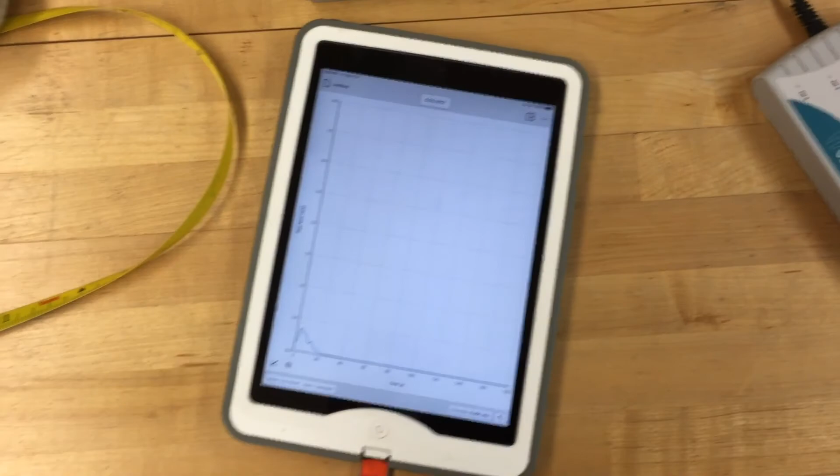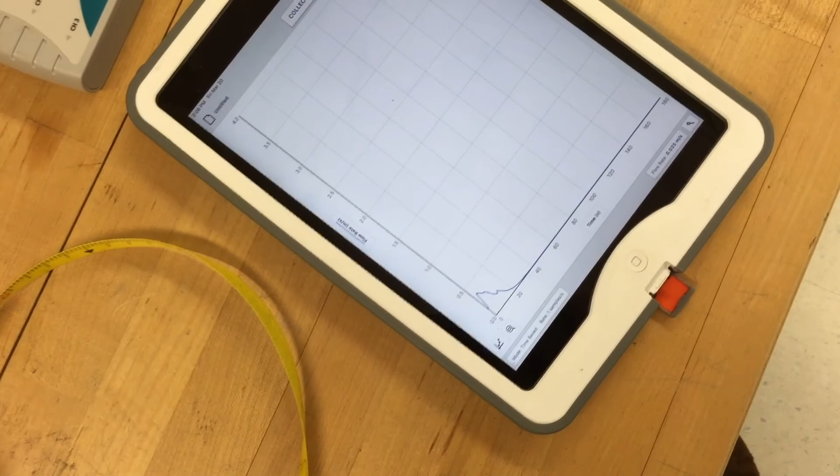Okay, we're back. So it's hooked up and ready to go, and you can see that it's had some time running along here. Ultimately, this is the time when I need 3 hands. But if you look at the graph here, and I spin the propeller, we have to push collect. And now if you look, when I spin the propeller, you can actually see that a line is being generated, and then we can save that, and it'll give us the velocity of the stream at whatever depth that we put it in.

So that's a little bit prep on the equipment. Now I'm going to go out and get in the car, and we're going to drive out and do the field trip. So I'll see you in a few minutes.

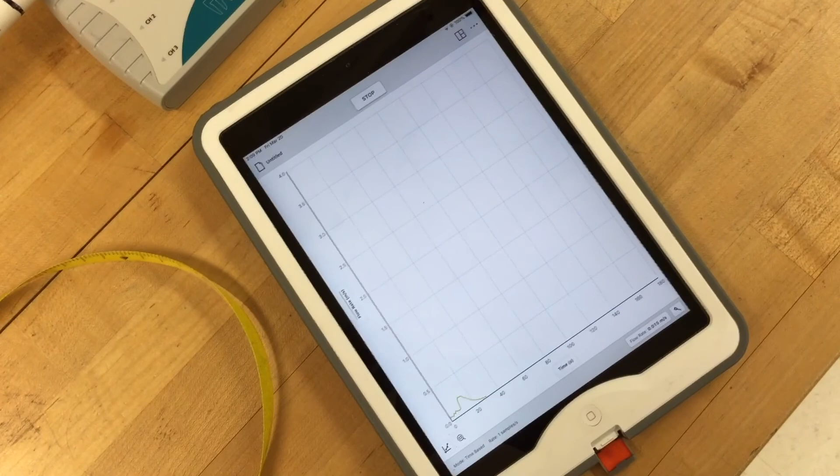Good afternoon, and welcome to the Carrabassett stream. We're located about 15 miles from the Colby campus, and we usually come here on a bus, but you can watch this field trip and complete the exercise in the comfort of your living room, your study, your bedroom, wherever you happen to be doing this.

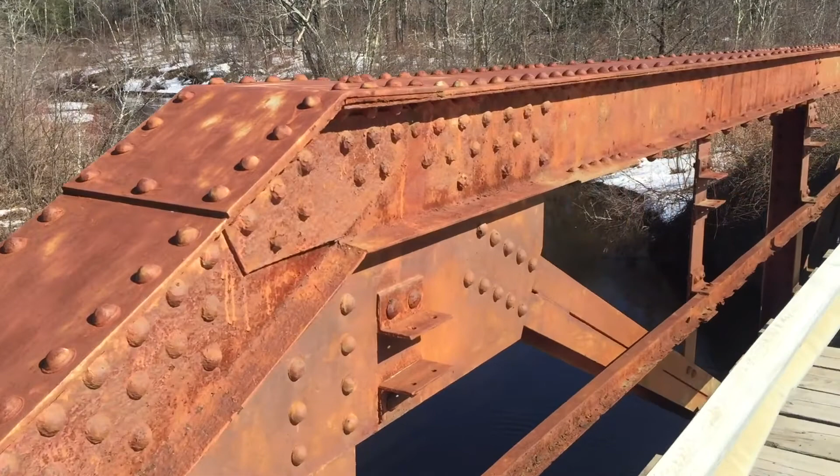Geologists have always looked at streams because streams have a variety of different capacities that they perform geologic work. Probably the one that's most easy to recognize is the fact that streams move sediment. But that's not the only reason that geologists are concerned and interested in looking at streams. One of the other things that we're concerned about is the fact that it produces energy. Water going over a falls makes energy. That produces power. We can use that to run a mill. We can use it to generate electricity. We can use it for a variety of different things.

What we're going to do today is we're going to actually calculate and measure the amount of water that flows underneath this bridge in a given amount of time. And what that measurement is called is discharge, and we use the letter Q to calculate discharge. Now, you should be a little bit familiar with discharge because it's just the volume of water that goes by a given point in a given amount of time.

You did that when you calculated permeability. Permeability is just the amount of water that flows through a sediment in a given amount of time. So you did that when we did that laboratory that looked at porosity, permeability, and grain size. So we're going to look at a little bit bigger body today. We're going to look at the Carrabassett stream. And the Carrabassett stream is a small tributary. It flows from Oak Pond up in Skowhegan, and it flows through Canaan and Clinton and ends up in the Kennebec River, just about where the big bridge goes over in Fairfield.

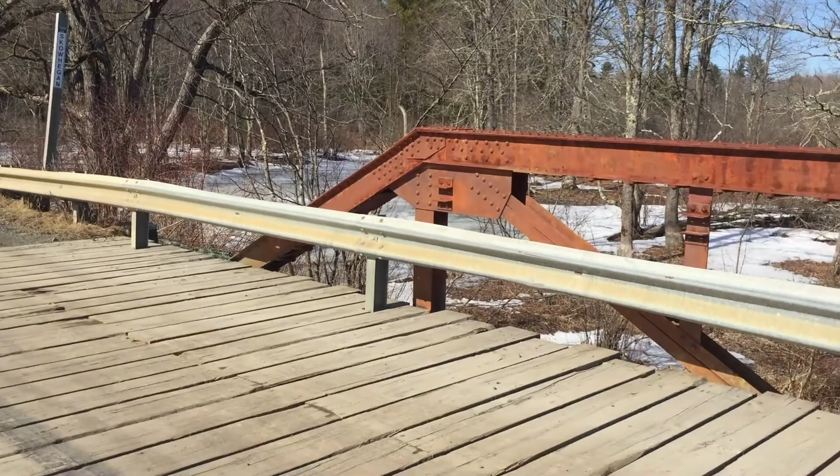So we have to take 3 measurements today during the course of our exercise. We've got to measure the width of the stream, and basically we'll just put a tape measure over to that side of the stream. Our measurements will be in meters. So we'll figure out maybe it's 15 meters, maybe it's 16 meters across, and we'll leave the tape measure there between the guardrail and the bridge abutment.

And every meter, like 1 meter, 2 meters, 3 meters, we'll go across and we'll actually take a big rock attached to a rope and we'll measure the depth. Then we'll take all those depth measurements, be it 15, 16, 20, add them all up and divide by the total number of measurements that we took, and we'll use that as our average depth. So we have two measurements, the width and the depth, and now we need to calculate the velocity.

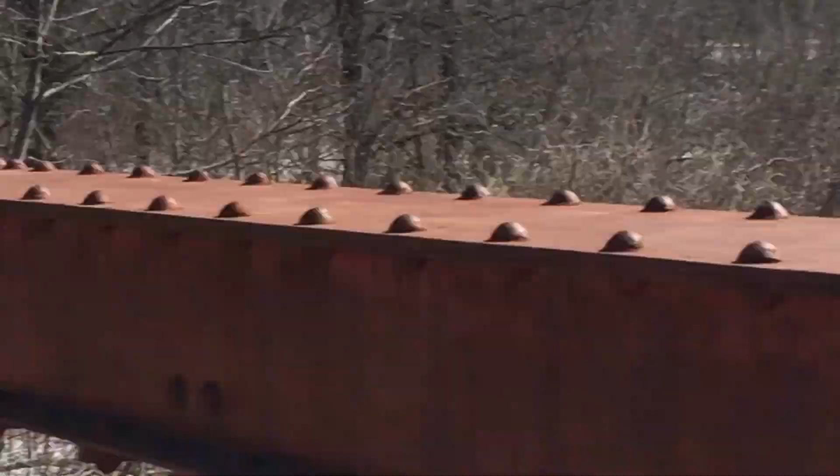If you look at the stream today, we can zoom in a little bit at the water, you'll see that the water is actually moving at a pretty good clip. You can see the current, and it looks like the water is coming at me. And if we go across, we can see the water's actually coming out underneath the bridge and flowing away from me on this side. So if we look at the geography, north is that way, and south is this way. So the stream flows pretty much from north to south.

There's a real simple way we could do this. We could take a stick, throw it in the water and time how long it takes to go from underneath the bridge to the other side. Then we could measure it, and we'd have distance over time, and we could calculate the rate. But what we found out is that the average velocity of the stream, which is what we actually need, is not on the surface.

Usually when I come out here and I ask students where they think the stream is the fastest, most everyone says at the surface. And there's a little problem in there. It's not exactly at the surface. There's friction between the water and the atmosphere, and maybe even the wind. You might be able to hear it today, though it's not too bad. The wind and the water actually cause the surface velocity to slow down.

So then people immediately will say, oh, then it's at the bottom. And it's not really at the bottom either, because there's even more friction at the bottom, friction between the water and the bed of the stream. So what we have to do is figure out where we would measure to get the average velocity.

What geologists have found over time is that if we take a depth measurement and we go down 6/10 the distance from the surface, it's a very easy calculation. Say right here at this point, we measured 2 meters. We'd multiply 2 meters by 0.6, and we would get 1.2. So we would take our velocity gauge and go down into the water.

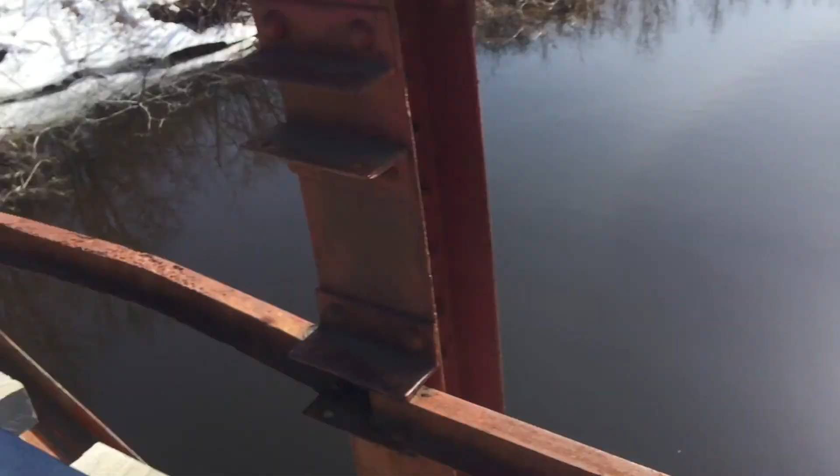We measure in meters of width, meters of depth, and meters per second of velocity. So if we multiply those three units together, we would get cubic meters per second. Now, in the United States, we're one of the only countries that doesn't use the metric system, so we typically measure discharge in cubic feet per second. And there's 35 cubic feet in a cubic meter.

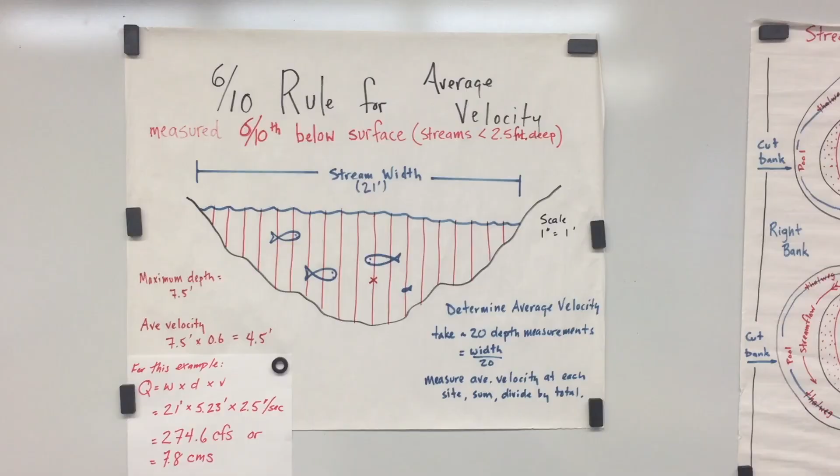So if we had cubic meters per second as our discharge, we could multiply that value by 35, and we would get cubic feet per second. And I think that pretty much takes us to the point where we actually would measure the stream and do the calculations. All right, some information that we brought back from the field. When we measure the average velocity, what we're going to do here is use the 6/10 rule.

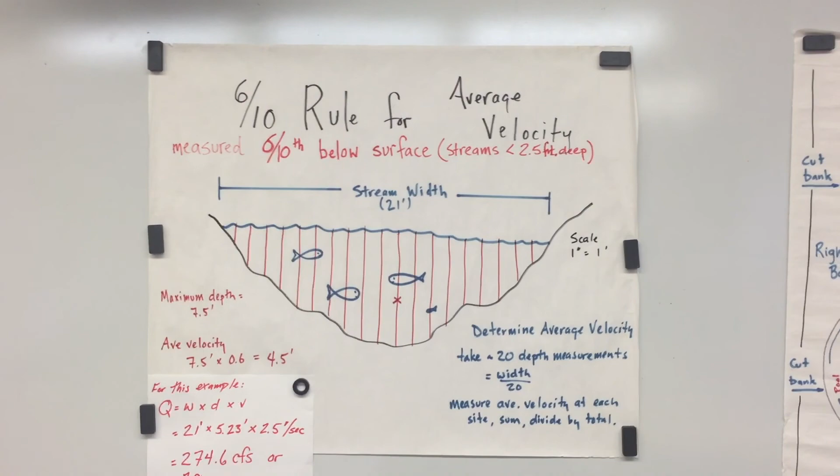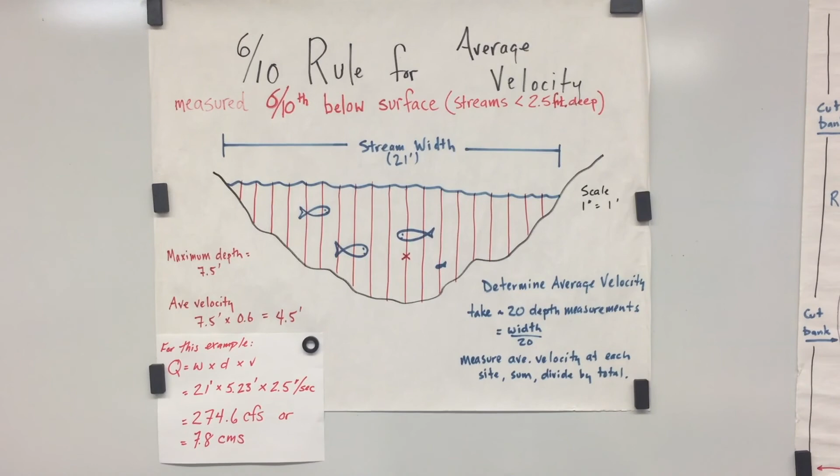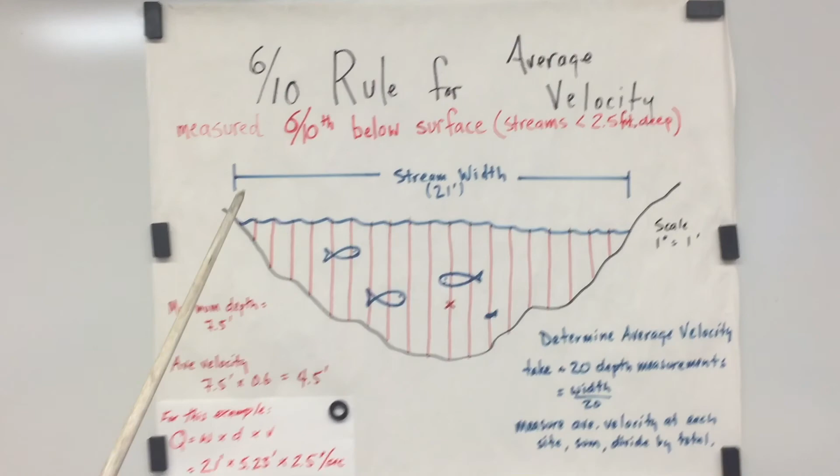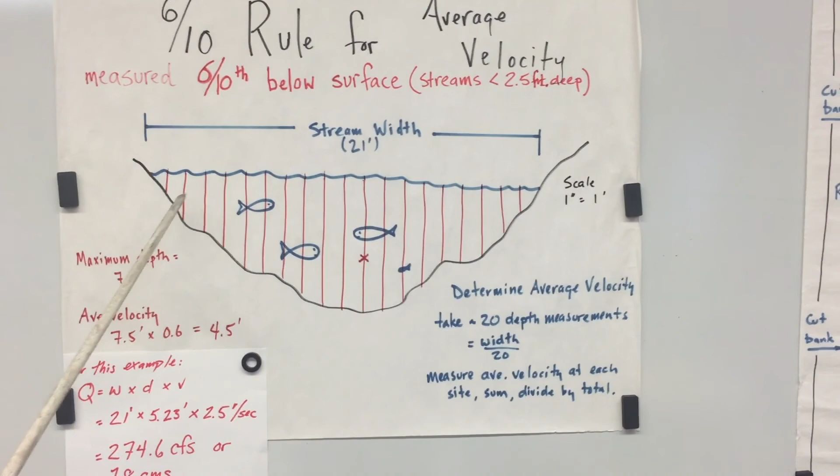And I think when I was measuring in the field, I used the wrong measurement. What I said was 6/10 of the distance from the bottom, but what we should measure is 6/10 the distance from the surface of the stream. So in this particular example, we're looking at a stream that has a width of 21 feet. We measured it every foot going across, so we have 21 measurements. We have a maximum depth of 7.5, and we added all those up, divided by 20, and came up with a depth of 5.23 feet.

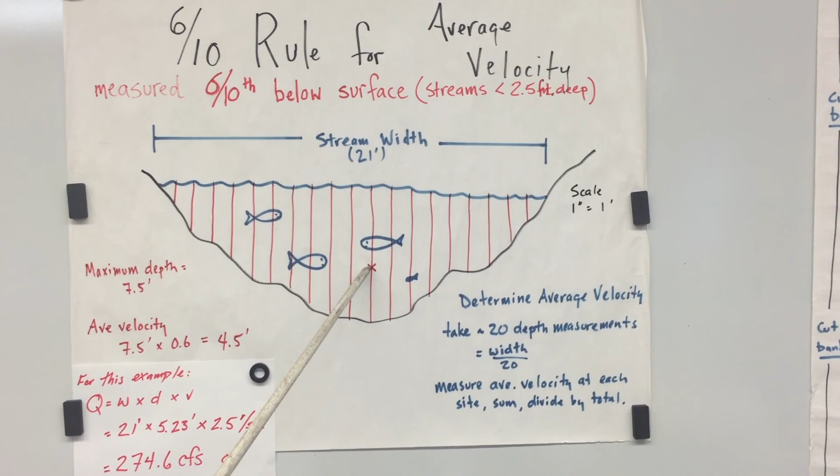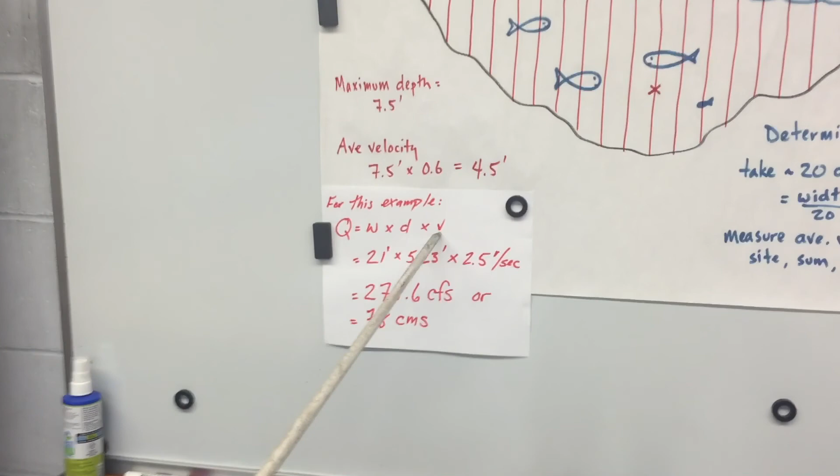Our average width is 21 feet, and to figure out where we're going to measure the velocity, we take our maximum depth, which is 7.5 feet, multiply it by 0.6, so we would come down at 4.5 feet, and that's where we measure the velocity. And arbitrarily we're going to say that the velocity in this particular stream came out to be 2.5. So we plug those into the formula where Q, which is the discharge, equals the width times the depth times the velocity.

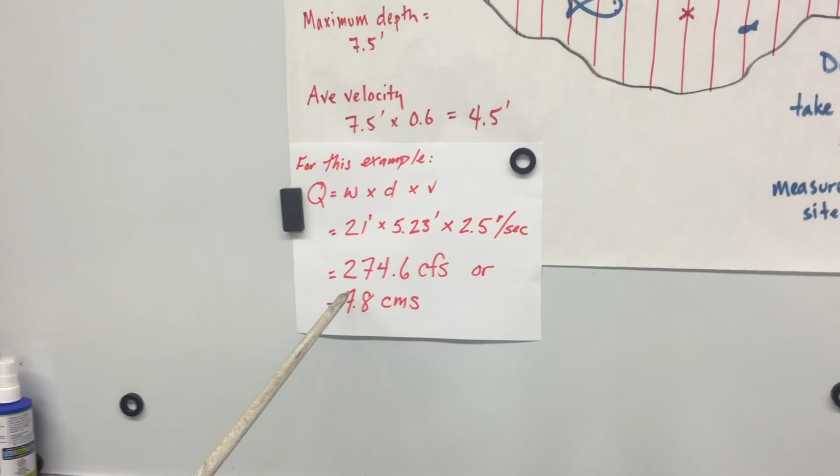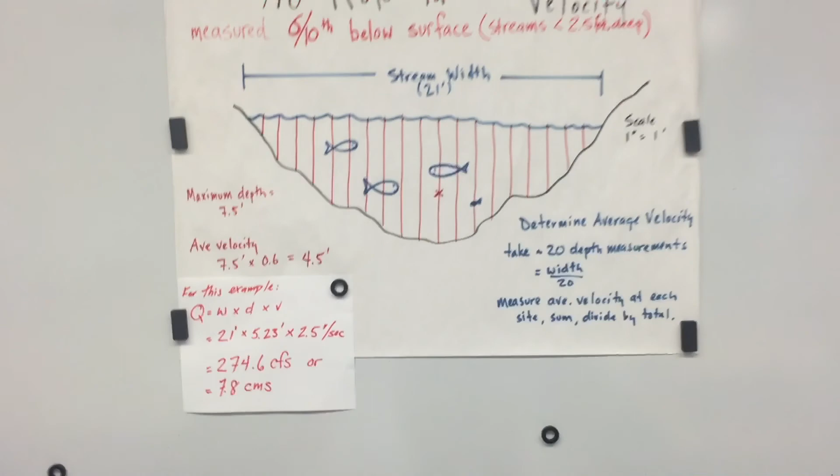The width is 21 feet, the depth is 5.23 feet, and the velocity is 2.5 feet per second, and we come up with 274.6 cubic feet per second, or if we convert it to cubic meters per second by dividing by 35, we get 7.8 cubic meters per second. So there you have a better explanation than I did out in the field, and that should work for what we need to do.

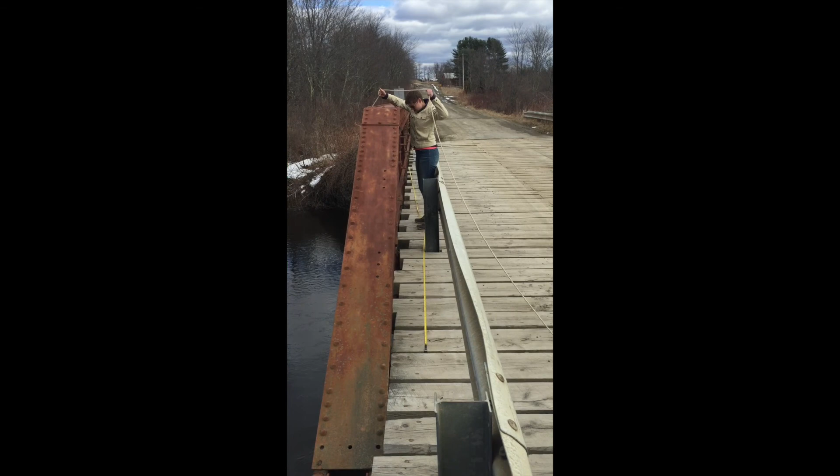Okay, so we got some live science going on here at the Carrabassett stream. My two colleagues, Laura and Manny, are dropping the weight down in and measuring the depths. We're going to add these cumulatively and come up with an average depth for the stream. You can see we have the tape measure set up between the bridge structure and the guardrail, and we're going to lower the weighted measure into the water at every meter going across. And we found the width of the stream is 14.9 meters.

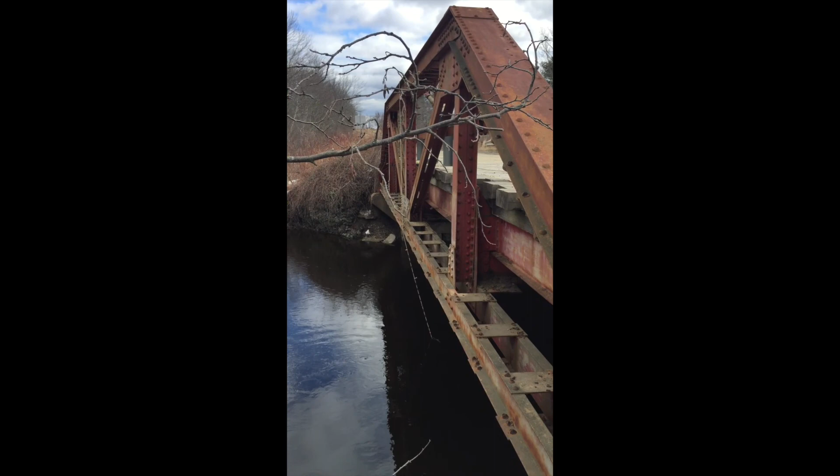Right now we're about halfway across the stream. We're saving you an awful lot of time of watching the excitement of science.

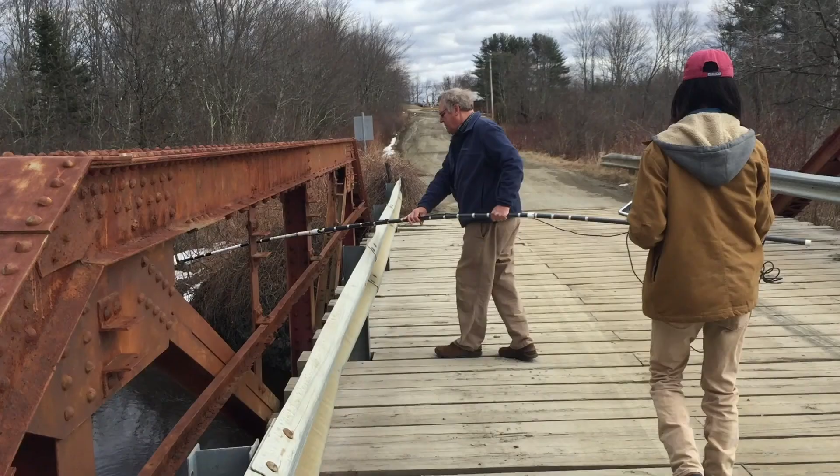What would you say this is? Oh, it's kind of going. Start playing. Sure, I can always crop it. All right, first thing, hey kids, don't do this at your house. All right, can you hold that? Right.